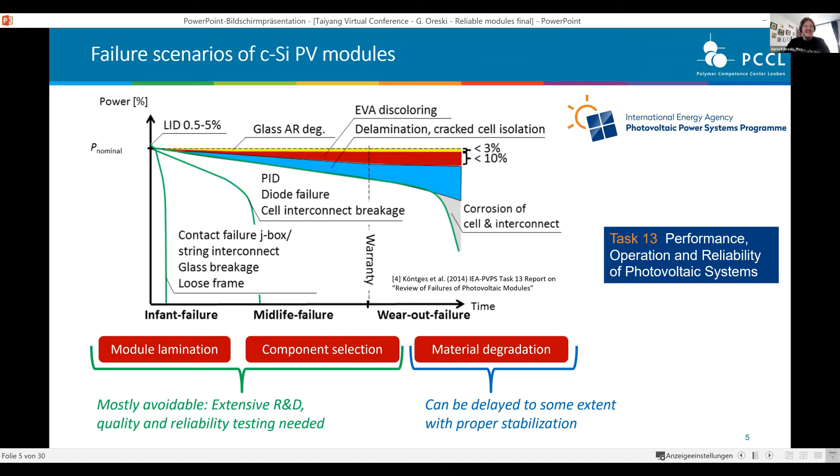In my opinion, because of this whole variety of materials coming up and getting importance in the market, in the future we will see much more failures related to compatibility issues. And I think a check of the compatibility of each PV module component will get more and more important. And what am I talking about when I say compatibility issues? I'm talking about adhesion of the single layers and the materials in the module. I talk about corrosion, and I talk about yellowing, especially backsheet yellowing.

Because what's the matter with adhesion? On the one hand, adhesion is strongly dependent on lamination parameters, and it's coupled, for example, with the cross-linking. But when you reduce temperature or time in order to get faster and save money, maybe you get less adhesion than needed, and in the long term you get delamination.

The other thing is adhesion, for example, between backsheet and EVA. Back then, when just TPT and EVA was there, it was easy. The backsheet manufacturers made some surface treatment of the inner layer, the cell side layer, and guaranteed adhesion to EVA. However, with these whole new materials, you cannot just optimize it for EVA, because a surface treatment optimized for EVA maybe does not work for a TPO encapsulant or for a POE encapsulant. So that's the first challenge.

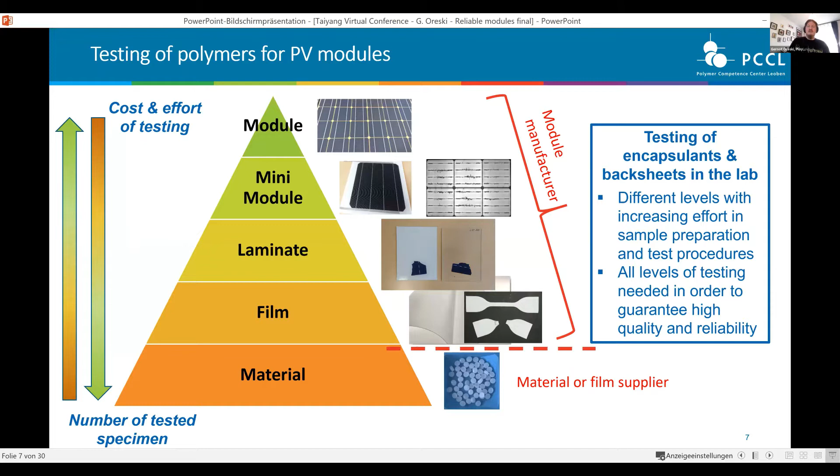So let's go through the single levels. So what can we learn from testing of polymer films? Okay, we learn something of principal chemical, physical, and mechanical properties, and we can learn something about the intrinsic degradation behavior of the polymers itself.

So what are the advantages of testing on polymer film level? You have an easy sample preparation and sample handling. You only need small aging chambers, and you have all characterization methods accessible. So we're talking about all destructive and non-destructive characterization methods you can imagine in polymer testing.

What needs to be considered? Influence of sample preparation, for example. So when you do some aging studies of your backsheet, please cut your specimen before you put it into a climate or a UV chamber. Because when you just expose a film and then cut it after, and the material has already embrittled, you see these nice cracks are forming.

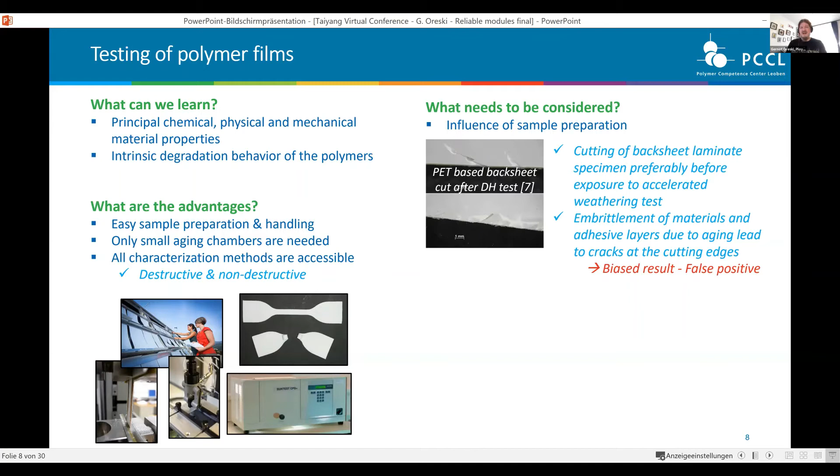And what you get is a biased result, and you get a false positive degradation behavior. That means degradation starts earlier just because of these cracks, which have a notch effect and, for example, lead to further backsheet cracking in the end.

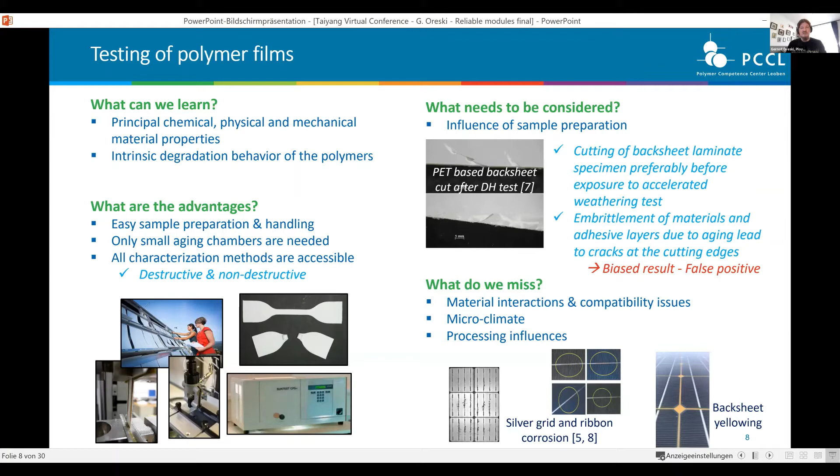So what do we miss when we just do testing of polymer films? We miss all kind of material interactions and compatibility issues. Actually, we miss the microclimate of a PV module, and we miss all the processing influence coming from lamination. So we don't see corrosion effects. We don't see yellowing effects, for example.

So some examples of where testing of polymer films is actually quite useful. For example, when you do a thermal and thermomechanical characterization of the encapsulants. So what do you learn there? You see where are my melting temperatures. You see something about the cross-linking of the material. When you do thermomechanical properties testing, you can learn something about shear modulus and shear viscosity. So parameters that are important for a PV module lamination process.

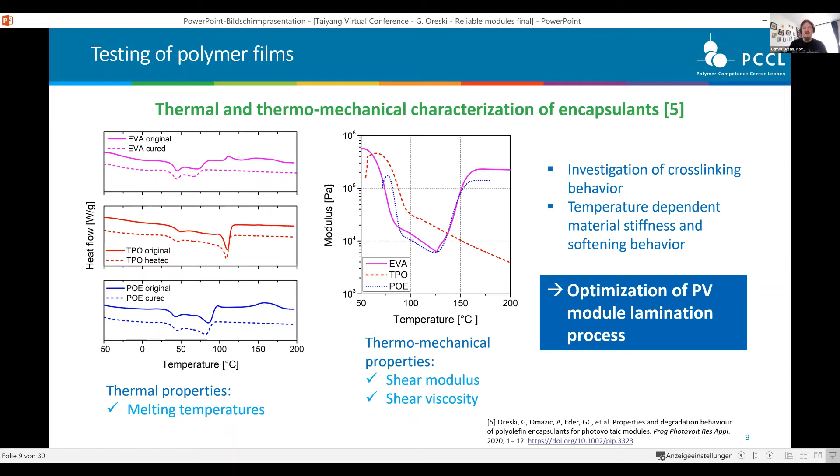And actually, you can use this method in order to optimize your process. Looking at these thermal properties, cross-linking starts around 120 degrees. So that's the temperature we need in the sample. From DMA, you see softening starts at 80 degrees Celsius. So you shouldn't apply the vacuum before that because then the material is much stiffer and you may introduce stresses. So this is quite handy and useful.

Another thing is, you can measure certain properties and use it for further analysis, further modeling. And that's an example we presented this year at the PVSEC. So we measured the coefficient of thermal expansion for different backsheets. And as most polymers, we have anisotropic properties there. And when we increase the temperature, sometimes we also have negative thermal expansion coefficients.

That means shrinkage. And the colleague from Fraunhofer ISE, Pascal Romer, then used these values for finite element analysis and found out that, because of these anisotropic properties, we have an increased probability of cell fracture during lamination.

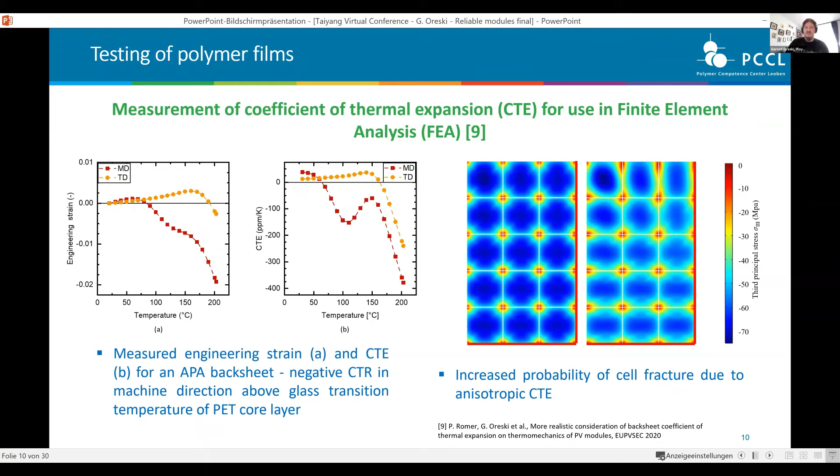Okay, let's go to laminates. So we take a small piece of glass, put encapsulant, backsheet, and sometimes other components like ribbons or pieces of cell in there. So what can we learn there? We learn something about material interactions and compatibility issues, like discoloration, corrosion, or adhesion.

Advantages, as before: easy sample preparation, only small chambers are needed, and you have most characterization methods accessible, except when you need to do some standardized specimen for mechanical testing, that's a little bit challenging.

What needs to be considered: even though we have the encapsulant, backsheet, glass structure, the microclimate is still different from full or mini modules because we have different diffusion lengths for oxygen, water vapor, or, in case you use EVA, for acetic acid. And the processing influences related to size or volume may be different.

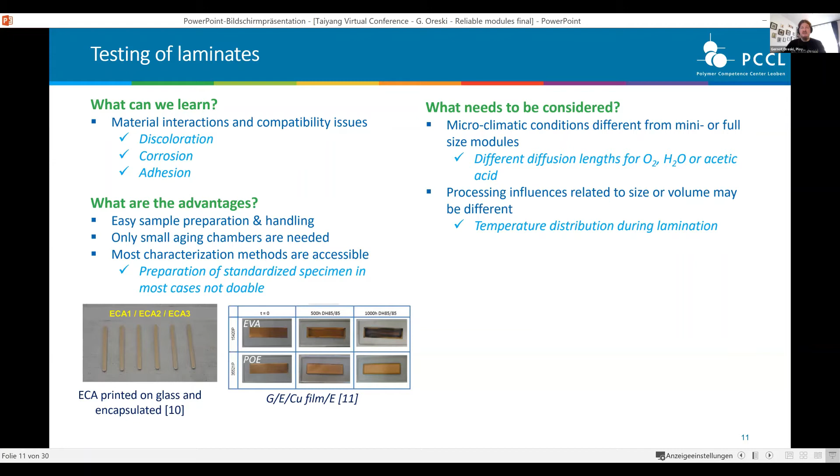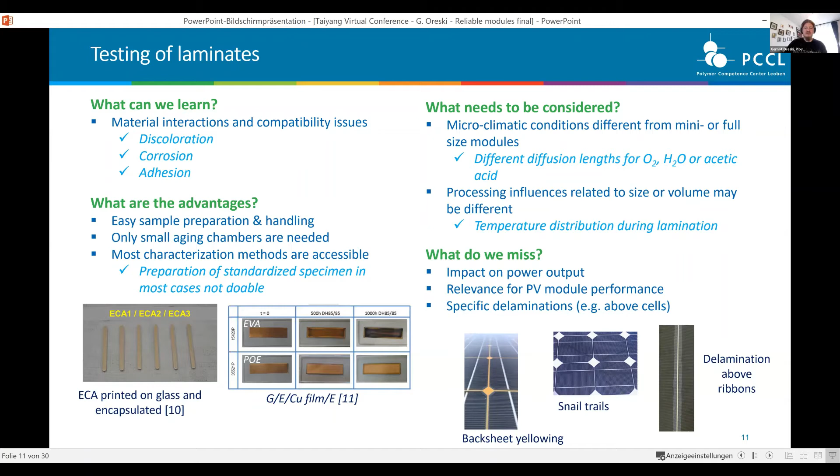One example, what we did a few years ago: we tested whether there are actually some interactions between electrically conductive adhesives used for replacing the solders in ribbons and different types of encapsulants. So we just screen printed these 3 ECA types on glass, encapsulated them, put them in some weathering chambers, and what we found out, yeah, in most cases nothing is happening.

We just saw a little bit of hardener migration from the ECA into the encapsulant, but we didn't see any correlation with power loss of the test module. And so our conclusion was actually, yeah, this lamination process and also the accelerated aging is not inducing any harmful interaction between ECA and the types of encapsulants we tested.

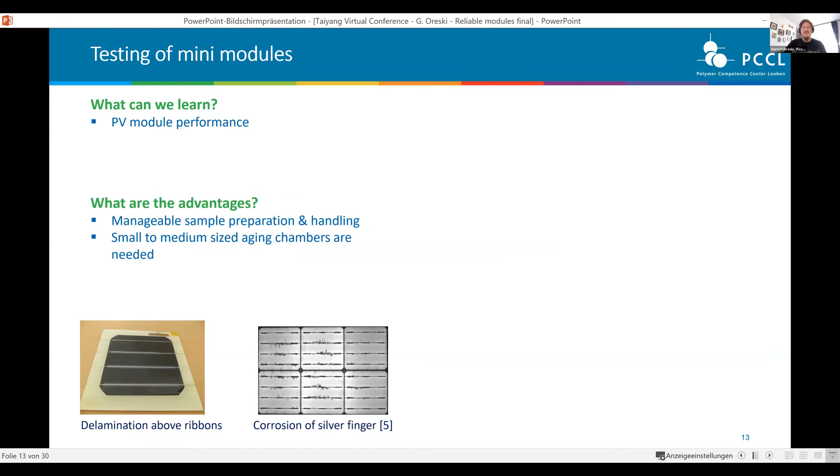So let's go to mini modules. What can we learn from them? Yeah, for the first time, we learned something about PV module performance because we can measure power output. What are the advantages compared to full-size modules especially? Yeah, we have a manageable sample preparation. So you need to prepare modules, but they're small, you can handle them, and you don't need the big chambers for testing it. So what needs to be considered?

That was a mishap that happened to us. For mini modules, often you don't use hardened glass for handling reasons, for price reasons, you just use standard glass. And then after some time, we found out, oops, we didn't check the UV cutoff. And so we tested like 5 different glasses. And then we saw, okay, the UV cutoff is somewhere between 300 and 320 nanometers of UV wavelength. And that's actually the most damaging part for the polymers.

And so when we use a very shielding glass for the mini modules and a non-shielding glass for the 6-cell modules, or the full-size modules, there will be a discrepancy in testing. Yeah, and when you want to have time series, you can only use non-destructive characterization methods with these modules.

What do we miss? Influence of components like frame or junction box. We miss realistic mechanical behavior, so talking about stress distribution and deformation levels. And also, we tend to overestimate power losses because we still have shorter diffusion lengths for water vapor and oxygen, for example. So, and finally, full-size modules.

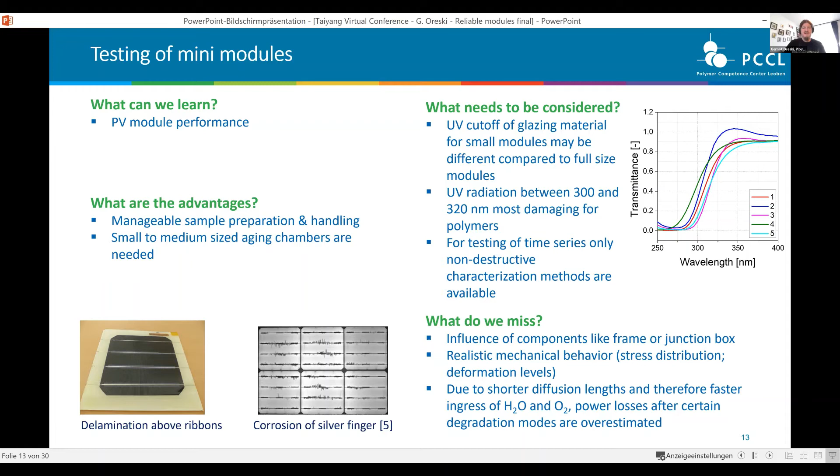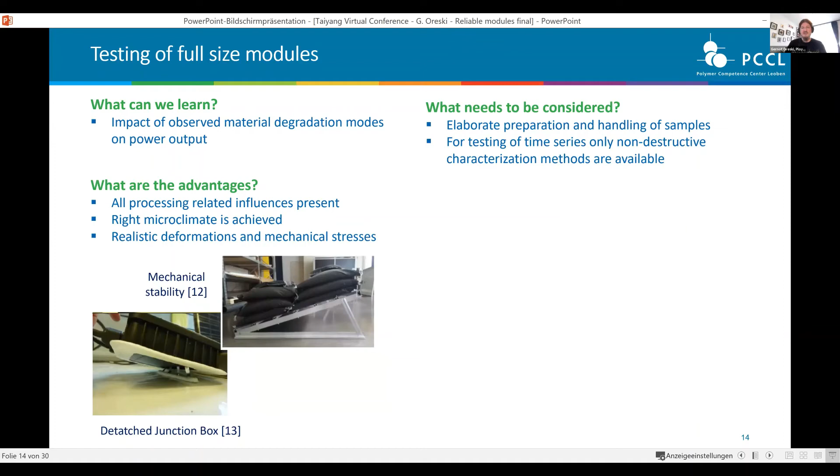What can we learn? Most of it, so impact of the observed material degradation modes on power output. What are the advantages? We see all processing related influence, the microclimate is right, and we have realistic deformations and mechanical stresses. What needs to be considered? Yeah, it's challenging handling the big modules, and you need the big testing chambers.

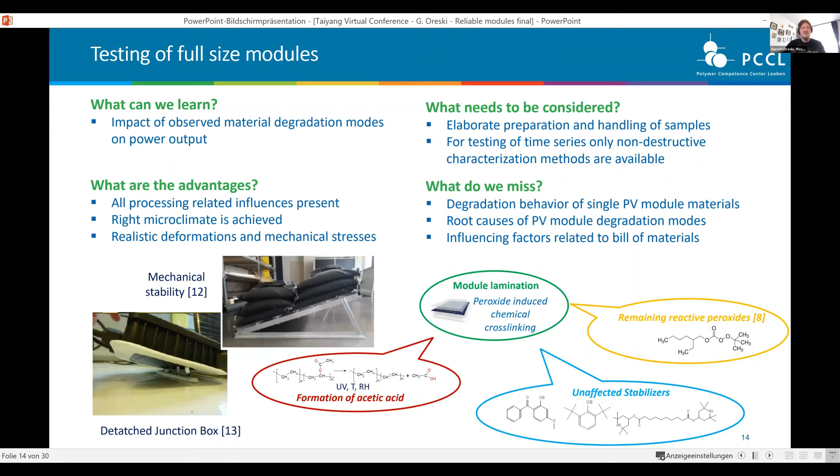So what do we miss? And now we go back to the beginning. When we just do full-size module testing, we don't know anything about the degradation behavior of single module materials and their influence on the degradation modes of the PV modules. And we don't know a lot about influencing factors related to the bill of materials. So what I want to say is you need all these steps in order to do proper testing.

So why is it important to understand what information we got from these different testing levels? Let's give an example. Let's talk about co-extruded backsheets. I think it was told before. The first one was introduced in 2010, a polyamide-based backsheet. After that, some other varieties evolved in the market.

We have some advantages compared to laminated structures. So like a full backward integration, so the manufacturer can do easy material modifications by himself. We have fewer production steps. We have therefore reduced processing-induced material degradation. We don't expect delamination, and in most cases we also have an increased sustainability. And the polymers used, polyamide, polypropylene, polyethylene, are usually cheaper than fluoropolymers or the PET films.

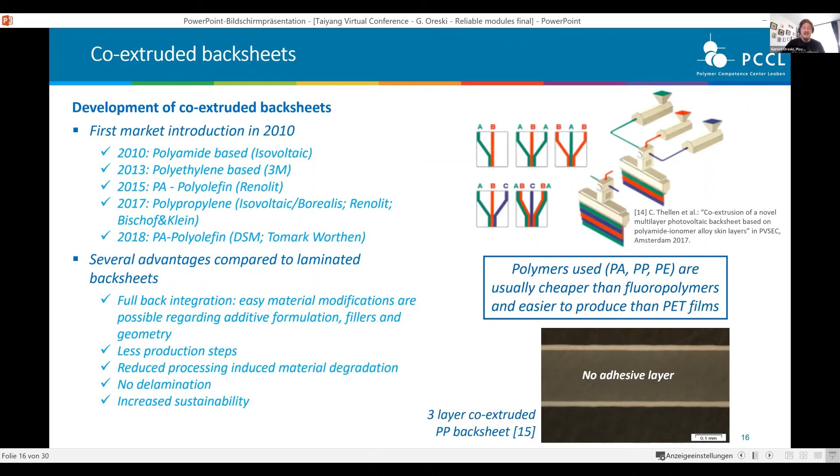What is still missing, and I think we will hear something later on from Kaushik from DuPont, is the track record. So PVF has a track record of more than 40 years outdoors. That's a thing we still have to achieve for this kind of backsheets. And unfortunately, we have a very, very prominent failure mode with the polyamide backsheet.

So in 2010, it was introduced. And actually, the major motivation was there was a shortage in the PVF supply, and the strong demand could not be met with PVF. And so many companies looked for alternatives. I think PVDF was one of the winners after that as well.

And Isovoltaic decided to go for polyamide. In the next years, around 10 gigawatts were sold. And unfortunately, after 6 to 8 years in the field, nearly all modules showed cracks, either these longitudinal cracks along the bus bars or square cracks in the cell interspaces.

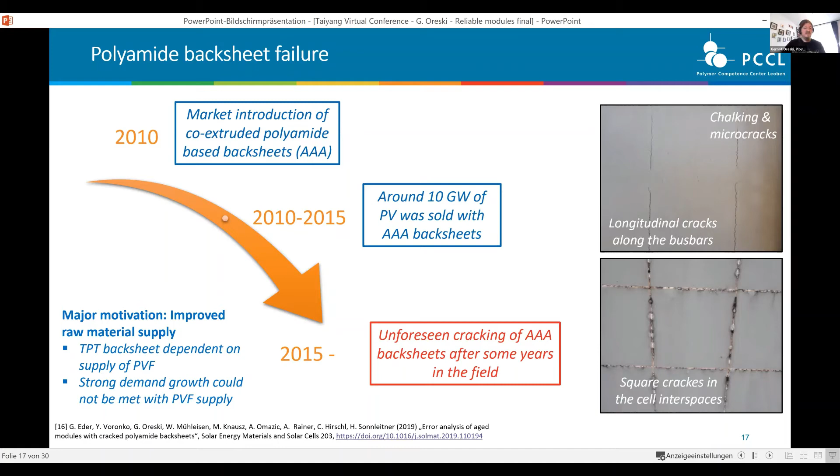Then after some years, obviously we have material aging. So in all cases, we observed formation of microcracks at local stress concentrations. That was found on every backsheet we investigated so far. In order to get these cracks in between the cells, that was happening only in combination with certain EVA types, where we saw strong photooxidation and cracking from the inside.

But in general, the crack initiation and crack propagation happened because of the daily and seasonal temperature changes in combination with the different thermal expansion coefficients of the PV materials. So keep in mind, polymers have a 10 times higher expansion coefficient than, for example, glass. And this hindered expansion causes thermomechanical stresses, and that is the driving factor for the crack propagation.

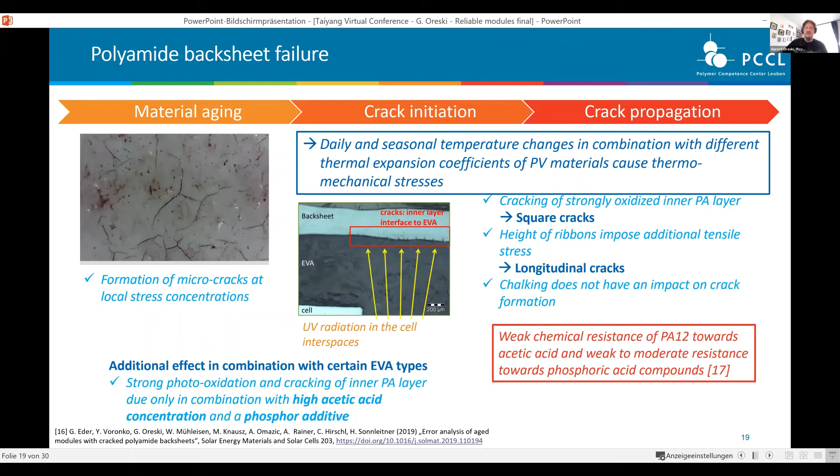So the interesting thing is these cracks have not been observed in the lab. Why? Because this crack formation is a two-step process. First, we need heat and UV to reduce the fracture toughness of this material. And then we need a continuously occurring mechanical and thermomechanical load that causes these internal stresses and is actually the crack initiating force.

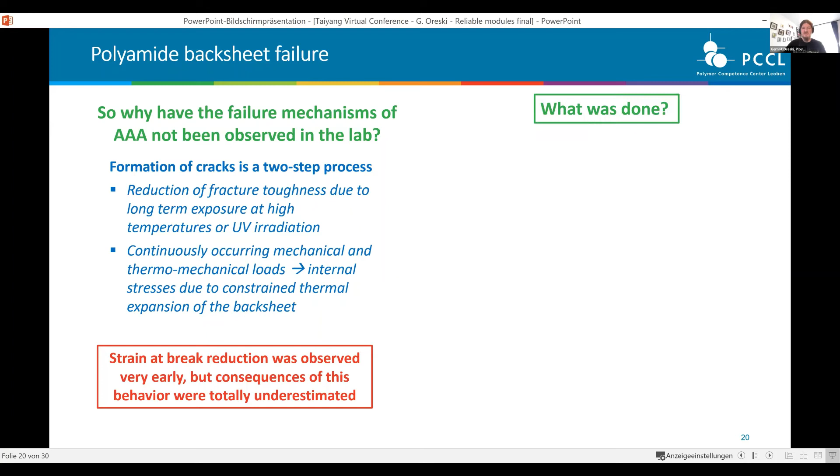This strain at break reduction was observed back then. I remember talks with the guys, but the consequences were totally underestimated by everyone in the market, or at least everyone I talked to. So what was done? The problem: we did single stress testing. They did proper testing, several thousand hours of damp heat and UV exposure of the film, but there no cracking was observed because there was no thermomechanical load on the sample.

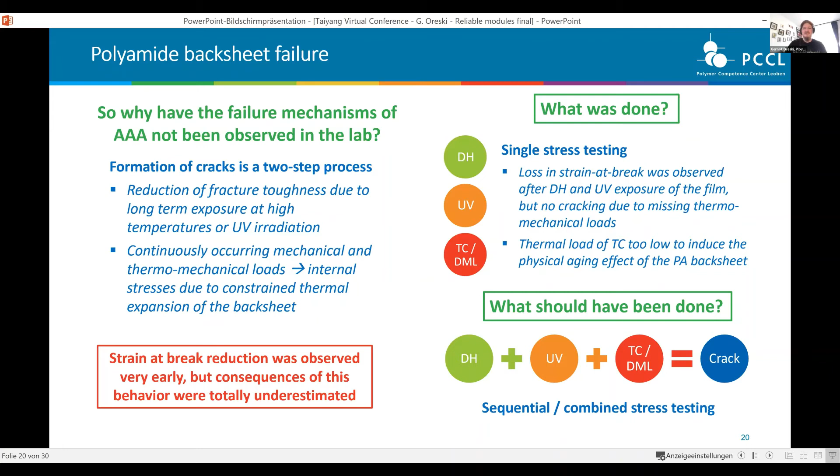Then they did modules, but they put one module in damp heat, one module in UV, one module in thermal cycling. In any case, no cracks appeared, because what should have been done was to put the module first in damp heat, then in UV, and then put some mechanical load on it; then the crack will appear. So you should do some sequential or combined stress testing. That's a big thing that has changed in recent years: the awareness that you need to do this test to replicate certain failure modes.

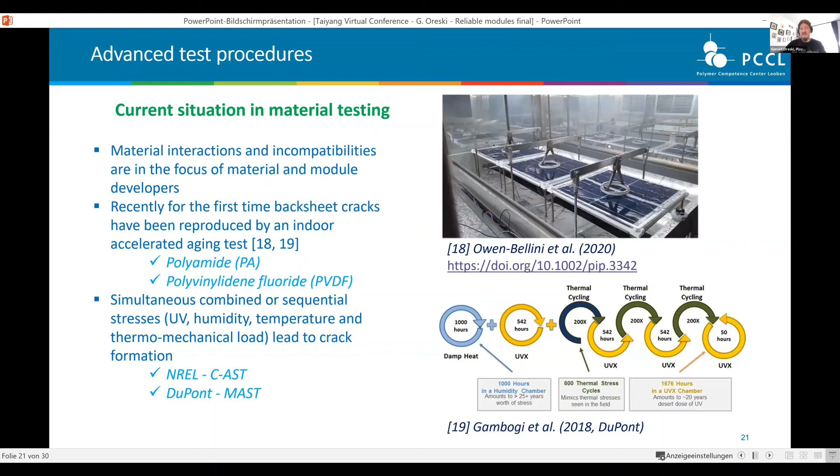And just to point out the most prominent initiatives: one is from NREL in the US, Denver. They have this combined accelerated stress test. The other one is developed by DuPont, this MAST test, which is a sequential stress test. And both of them could reproduce the cracking of the backsheets, not only the polyamide backsheets, but also, for example, PVDF backsheets, which is quite prominent.

So, what about polypropylene? Can this happen to polypropylene as well? Let's take a look at the properties of polypropylene backsheets. As you see from the strain curves, it's quite different to a PET-based backsheet. We have lower stiffness and a higher flexibility. When we expose the film to damp heat and irradiance, you see polypropylene is quite stable, whereas for the PET, we see very quick embrittlement.

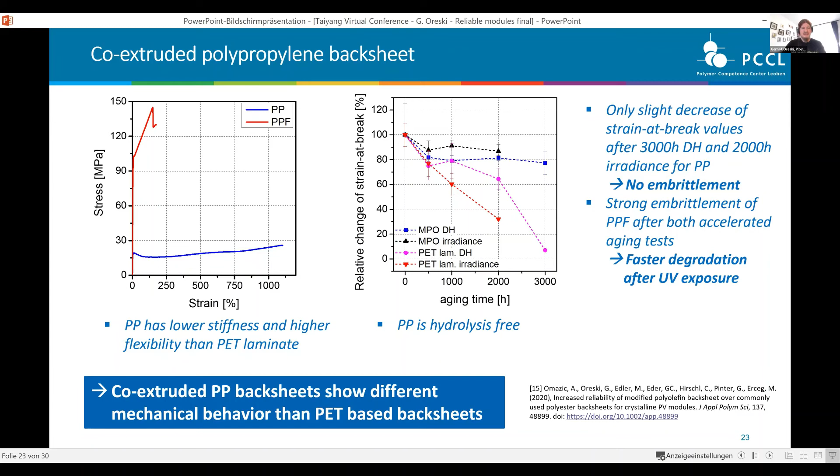What are other properties? They are quite white, at least this material we had, so it had a much higher reflectance. And actually that led to an increase in power of, let's say, 60-cell modules from 1.5 to 2.5%. So it's quite a nice thing. Instead of the grid we heard about before, also use a very white backsheet and you will get some power gain.

But in any case, we observed yellowing at the backsheet encapsulant interface. And that's what I said: some additives are migrating in there, reacting and causing this bad color. So you should really do your design matching in order to make it work.

So in another project, we had these backsheets outdoors for 2 years in different locations in Europe. And except for some photo-oxidation on the surface, we didn't find anything. So there was no polymer degradation in the bulk that we saw. And actually other studies that have been presented at PVSEC in the last years, for example, I think Fraunhofer investigated the Bischof + Klein material.

Renolit, François Rummens, hello François, I saw you are online.

They also presented results on their polypropylene backsheets, and I think the conclusion from all these studies is the same. So far, we see an excellent stability of PP backsheet films, especially towards UV. Renolit did like 24,000 hours of UV exposure and didn't see any discoloration of the encapsulant or embrittlement or corrosion. Fraunhofer just saw yellowing, but in dependence of which kind of stabilizers were used. And that's the only thing that was reported.

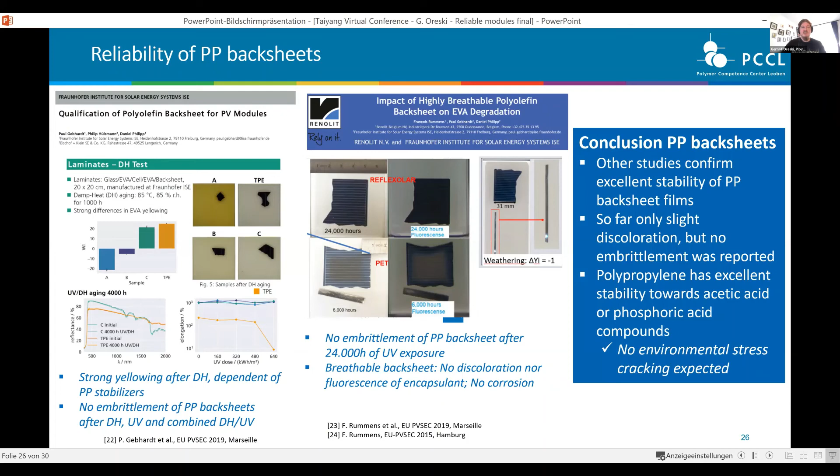And additionally, when we use it with EVA, and that's the big difference to polyamide, we have an excellent stability towards acetic acid. So we don't expect environmental stress cracking with this material. To summarize, I think we all know encapsulation materials, backsheets and encapsulants, play an important role in PV module reliability because most of the prominent PV module failure mechanisms are linked to the polymers used. The long-term stability is determined by which kind of material you choose and what kind of interaction they have. And when you do a proper design matching or check the compatibility, you may certainly reduce degradation rates or avoid certain degradation modes at all.

And my speaker before mentioned PID, for example. But each material combination should be tested thoroughly before introduction into the market. So really do your testing, do your homework, and then you usually should get high quality modules. And all test levels from film to full size modules are needed for a comprehensive understanding of the long-term material and module behavior. And most important, single stress tests are good and you can learn something from them, but very often they don't reveal certain degradation modes which are observed in the field. So we need combined or sequential stress testing in order to reveal these degradation modes.

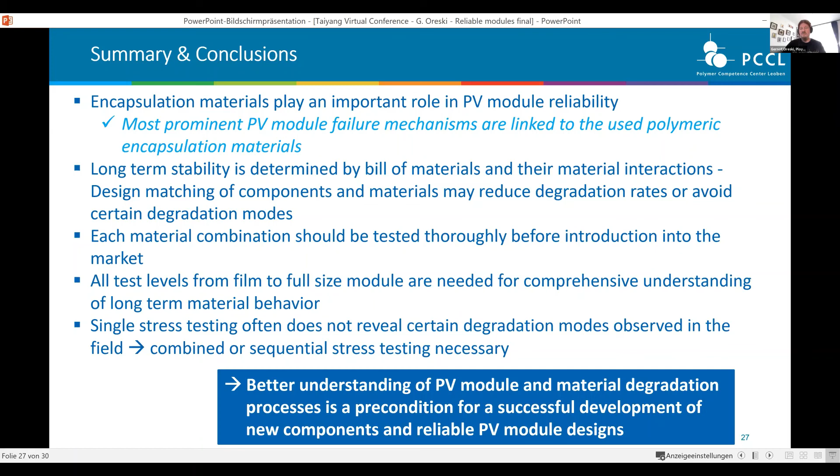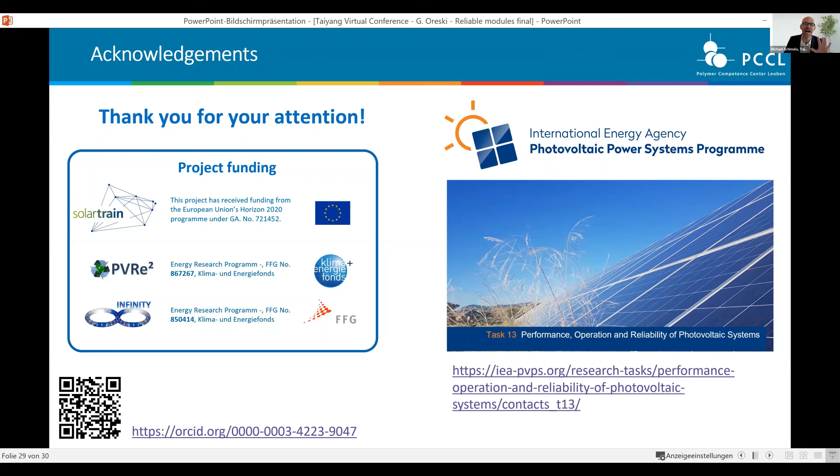Thanks, Gernot. So a break-fix approach is not the right one in module manufacturing. Maybe one question, actually. You spent quite some time of your presentation on the backsheets from Isovoltaic, and yes, polyamide's market share is not so big these days. But what is the difference between today's products using that composition compared to the products that failed?